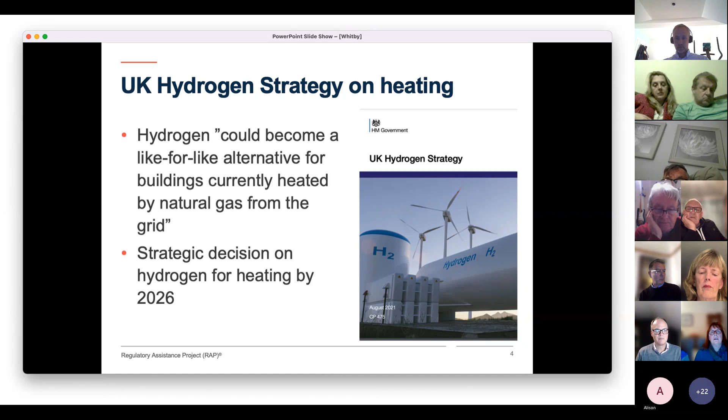The actual amount of hydrogen that will be used in buildings, according to the strategy in 2030, is very, very small. It's about 0.3% of current gas use in buildings. So it's a tiny amount that could go up if the government decides that it's a sensible way to heat buildings. But for 2030, at this point, that is basically the trials. The number that you see here for buildings is the amount of hydrogen needed to complete the trials. There are many different trials.

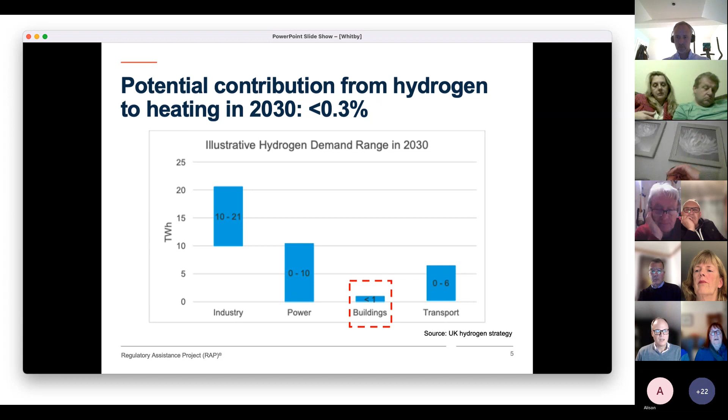I don't want to go through this in detail, but the trial in Whitby is just one of many. There are also much larger trials being planned for a whole town. There are trials going on with blending, and there's also development of hydrogen-ready appliances already. There are prototypes of those. So there are lots of things going on to test the use of hydrogen, but at this point, it's all about testing, assessing, evaluating. There hasn't been a commitment yet of any kind to what extent buildings might be heated with hydrogen.

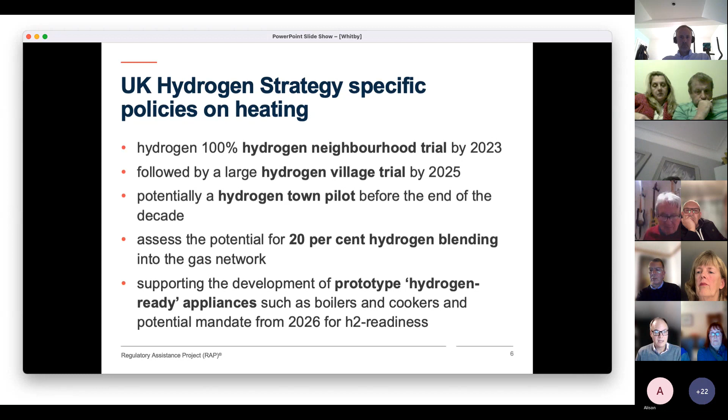And I wanted to talk about costs briefly, and I wanted to do that in kind of two steps. First, I want to talk about UK costs of hydrogen, and then move on to the question, what does international evidence say about hydrogen for heating more generally, and then conclude. So for the UK, I'm going to separate this into blue and green hydrogen, because those are the two main types of hydrogen that people talk about.

And the first, I think, important point I wanted to make here is really that hydrogen can never be cheaper than the fuel it is made from. It seems an obvious point, but it's very important. You know, sometimes I hear that hydrogen will be cheaper than using natural gas. That's very hard to believe when the hydrogen is actually made from natural gas. And I will explain in a minute why that is.

Or hydrogen could become so cheap that it's a lot cheaper than using electricity. Well, if it's made from electricity, again, it's very difficult to see how that would work. So let me explain that in a bit more detail and actually show you some cost figures to compare it against the current cost of gas.

So for green hydrogen, it's important to understand that a lot of energy is actually lost in just producing the hydrogen. And I'm sure Paul and Tom will have other figures. These might be too optimistic, just from a very recent study that has been done. So we actually need significantly more energy to put in to make the hydrogen and then burn it in the boiler. And we lose quite a lot of energy on the way. That's the purple arrow here. That just happens as part of manufacturing. Again, Paul and Tom can explain exactly why that is, but essentially it's waste heat that can't be used in the hydrogen production process.

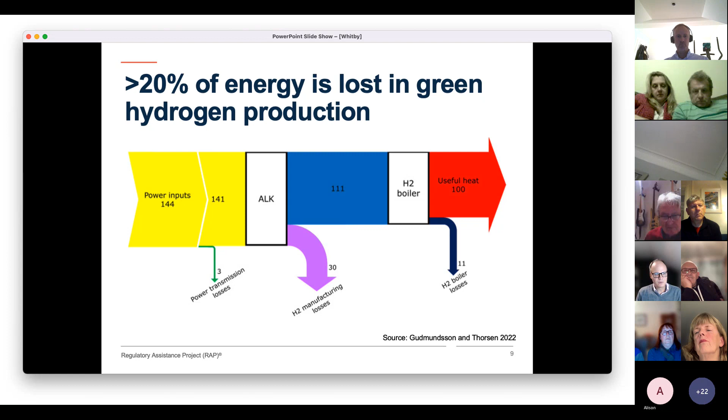And when you then translate that into costs, there's a very useful resource. I'm using the government's own prediction here, which shows you for different years in the future how hydrogen costs could evolve. And let me talk you through this. So the upper curve, grid electricity, shows you the cost in pence per kilowatt hour at the point of production. This is at wholesale level, point of production, not retail price. That's very important to understand. When hydrogen is made from just grid electricity, so if you have an electrolyzer that you plug into the grid and you make hydrogen, that's what the cost would be.

The blue shaded area around it shows you the minimum and maximum estimates that the government is assuming for the cost of hydrogen from grid electricity. So you see that currently it's about 16p per kilowatt hour, maybe going down to 14, 13 pence per kilowatt hour. And you compare that to the cost per kilowatt hour for natural gas before the pandemic, so 2015 to 2020, right at the bottom of the chart, which was about 1.5 pence per kilowatt hour.

Again, this is wholesale level, not retail level. So the gas that you all get in your boilers has a much higher price, of course, because there's also distribution charges in that and other costs too. So this is just the wholesale level cost. The retail costs are much higher. But that's how the government is calculating those costs, so that's why I compare them to that.

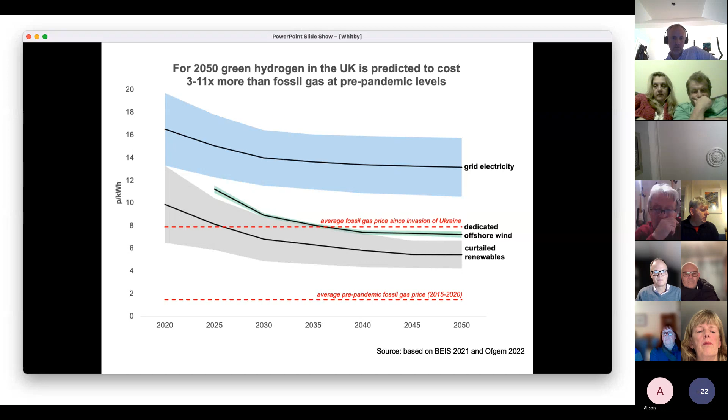And I want to move on to blue, and again start with a graphic that shows why hydrogen, blue hydrogen, is going to be more expensive than natural gas. The main reason here is losses, again, in the production process, and Paul has already described those. Essentially, you need to put in an awful lot more gas to get the same amount of energy because of these efficiency losses involved in the process of getting hydrogen out of natural gas. And that translates into higher costs, which I will show you now on the next slide.

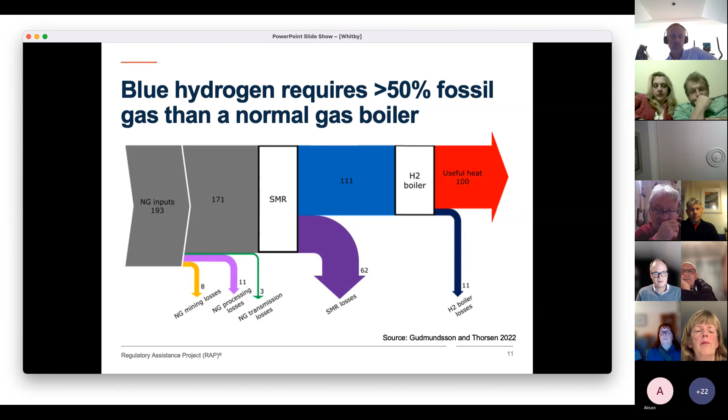Slightly simpler graphic. Again, you have the average fossil gas price currently since the invasion of Ukraine at the top, and then pre-pandemic fossil gas price at the bottom, as on the previous slide, with costs. And blue hydrogen sits about in the middle of those two price trajectories, but it's about 3 to 4 times more still than the average gas price, before so earlier this year.

And you have to also understand that, of course, if we now made blue hydrogen, the costs would be a lot higher, because this projection was done in 2021 and was based on prices around that time, which were significantly lower. So blue hydrogen costs now would certainly be higher than the average gas price we currently see. How much higher? I haven't calculated that, and the government hasn't calculated that either, but significantly higher than 8 pence per kilowatt hour at the point of production.

So that's kind of the summary of what the cost data for the UK says. So green hydrogen, again to repeat, about 3 to 11 times more expensive than gas prices before the pandemic, and for blue hydrogen, we're talking about 3 to 4 times more expensive. Possibly more, because gas prices have gone up, and so will have gone up the cost of blue hydrogen production. That's on the costs. I'm sure you will have some questions on that later. I know there's a lot of detail, but I just wanted to show you the full picture of what data is available for the UK.

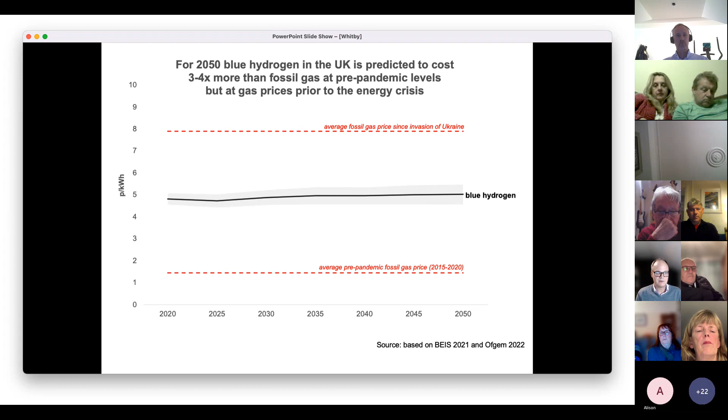And now, just very briefly on the independent evidence on hydrogen for heating. I spent a lot of time trying to understand what kind of studies have been done in this area. And I found 32 studies that were carried out without any funding from any particular industry. So no funding from, for example, the gas industry, from the heat pump industry, the boiler industry, the electricity industry. These are all studies done independently of any particular business interests. And I found 32 studies. And none of them supports the use of hydrogen for home heating, at least at scale. Maybe in some niche applications, but not at scale.

And here are just some of the organizations that have produced studies on this: the International Energy Agency, the Intergovernmental Panel on Climate Change, McKinsey, the UK Energy Research Centre. There are many others, Imperial College, many very reputable international and national organizations, and they all come to the same conclusions. And that work has been published in a peer-reviewed journal recently. I know some of you will have seen that, where I collate all the results and look at all these studies. And the headline is what I said before: none of them supports the widespread use of hydrogen for heating.

Why is that? Well, the main reason really is to do with the cost figures I've shown you. The conclusion is that hydrogen for heating is going to be significantly more expensive than all of the alternatives that exist. I don't think I have time to go through them in detail, but essentially we're talking about the use of district heating, that is local heat networks. We're talking about heat pumps, energy efficiency. Those are the key three technologies that offer a cheaper pathway to reducing carbon emissions, and already today can be deployed. So that's all I wanted to talk about, really, and just summarize in three conclusions.

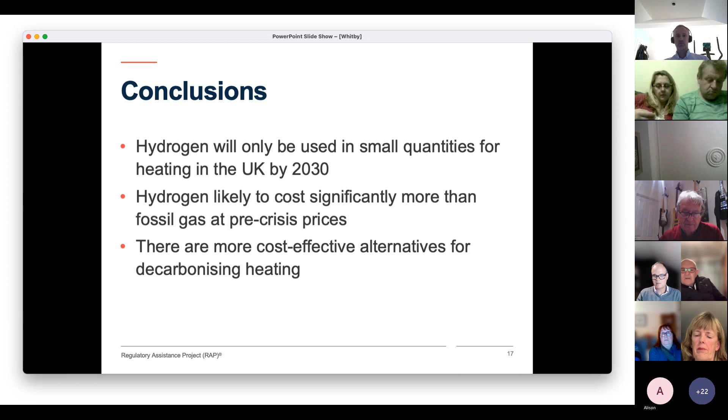Thank you very much, Jan. Any questions?

Prices have jumped by almost 50%. Well, what can we do about it? How can we change it? How can we change the course? How can we change the costs? No, the course. It seems to be just going ahead anyway, doesn't it, right now? What can we do as participants in the experiment to change it?

Well, the purpose of this call, I think, is really just to arm you guys with the facts, in the hope that you can talk to your fellow residents. Yeah, yeah. Spread the word, yeah. I wouldn't lose hope, because although there are some pretty powerful forces in the shape of Cadent, they need huge subsidies, and the government isn't made of money.

There's a lot of people who understand enough within the government. The Committee on Climate Change, CCC, is incredibly well respected. Very, very good people. They're an independent body that advises the government. Well, Jan, you know that body better than I ever will. What does the CCC say about all of this?